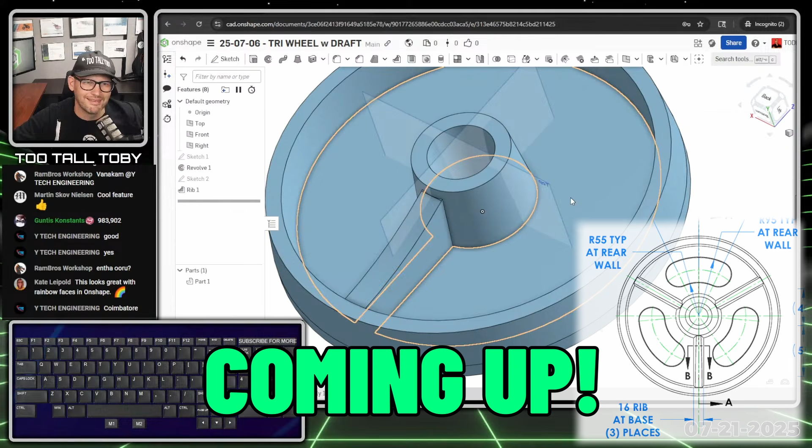Now, the one thing about this face here that really doesn't look that good is that we've got this face, and this face, and this face. We've got these kind of extra faces here.

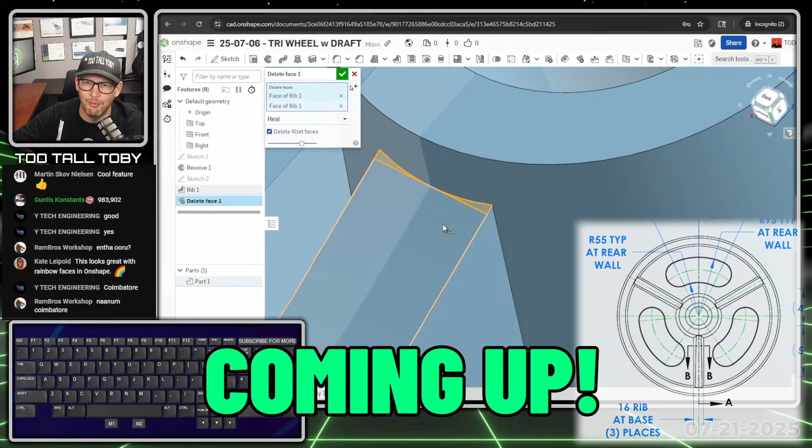So if you do want to get rid of those faces, I think the best way to do that is to use delete face. So I'm going to choose delete face here. And when I choose delete face, I can choose this little extra geometry that I wasn't anticipating. So I'm going to delete those two little faces and say heal, and hit the green check mark, and oh yeah, that's what we wanted.

Hey, what's up everybody, and welcome to today's Onshape step-by-step tutorial where we are going to design a plastic part with draft. This is a pretty cool part. It uses drafted angles on various features, some ribs, some patterns. I think you're really going to enjoy this part.

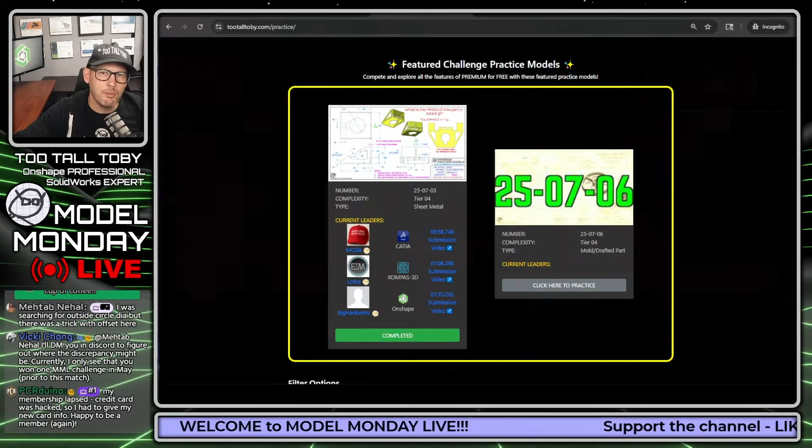So go ahead, jump into it, it says click here to practice, and all of you can attempt to model this. And now we are going to attempt to model this together using Onshape.

So right now we're watching this episode of Model Monday Live. It's July 21st, and all the people over in the chat are attempting to create this 3D CAD model, and now we are going to try to create it as well. Maybe we can beat some of these speedsters in the chat.

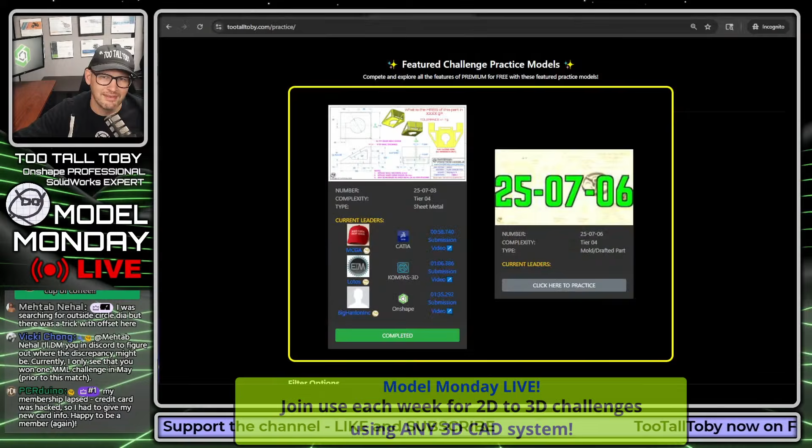If you haven't joined us for Model Monday Live in the past, be sure to join us for the next episode. On this second half of the show, we are going to be challenging the chat and each other by doing a live solve using Onshape, solving this using the Too Tall Toby Practice Models app. So we're going to head over to tootalltoby.com.

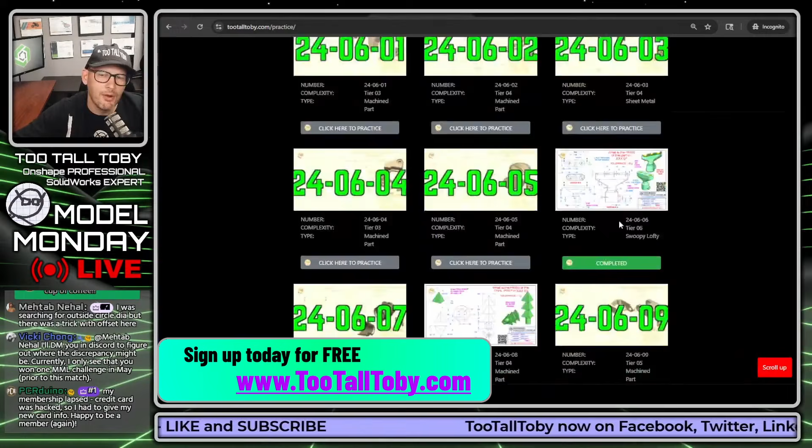We're going to sign up for a free account. We're going to click Access Full Library. And we'll see here that up at the top of the library, this is a library of over 190 challenges. They can be sorted by the type of challenge you're trying to do, whether it's a 3D printed part, a woodworking part, or a sheet metal part. They can also be sorted by the level of complexity: tier 1, tier 2, tier 3, tier 4, tier 5. You can do all this cool sorting here.

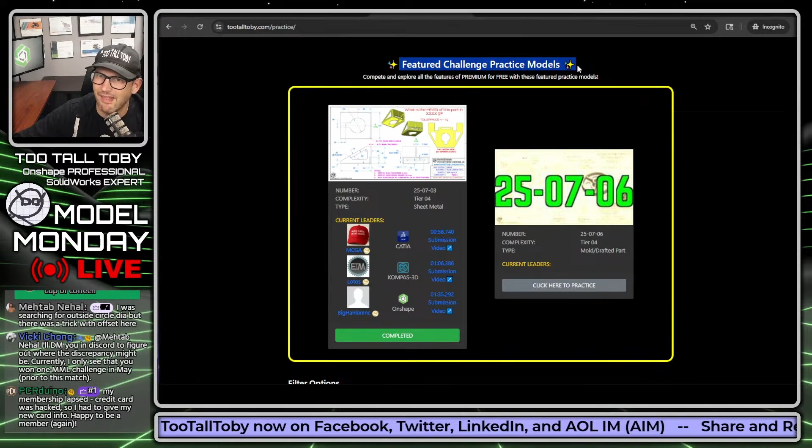But what we're also able to do is participate in these featured challenge practice models up at the top of the screen. And right now, all the people watching Model Monday Live are trying to complete this challenge here.

So I'm going to click here to practice, and we'll see there's a lot of skills tested in this challenge: draft, patterns, revolve, ribs, slot tools, symmetry, thin walls. I got a feeling this part is going to be plastic injection molded just from that list of skills.

Let's see here. Nobody's done this yet. We just released it about 30 seconds ago, so of course nobody's done it yet. I'm going to click here to begin and go. So the question here is, what is the mass of this part in grams? We're going to try to calculate that mass, and then enter it down here.

If we enter it correctly, we're going to earn a point. If we enter it incorrectly, it's going to say your answer is incorrect. You need to keep trying.

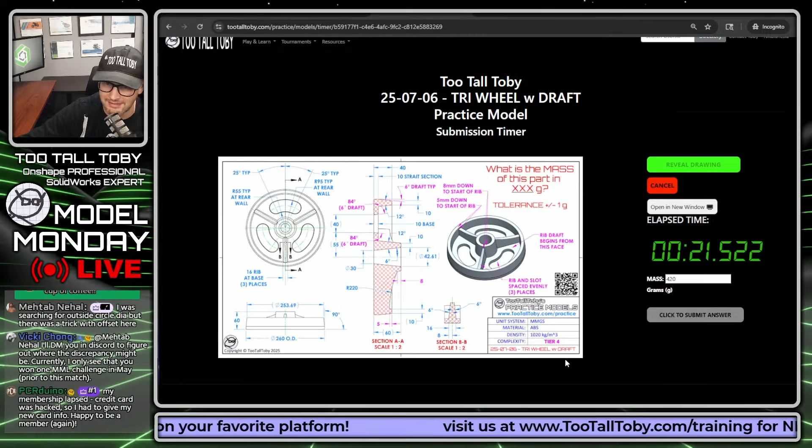So we need to come up with the correct mass, and we need to come up with the correct material density. We see in the title block that the material density is 1020 kilograms per cubic meter, and that is the material ABS, which I've already got in my Onshape custom library.

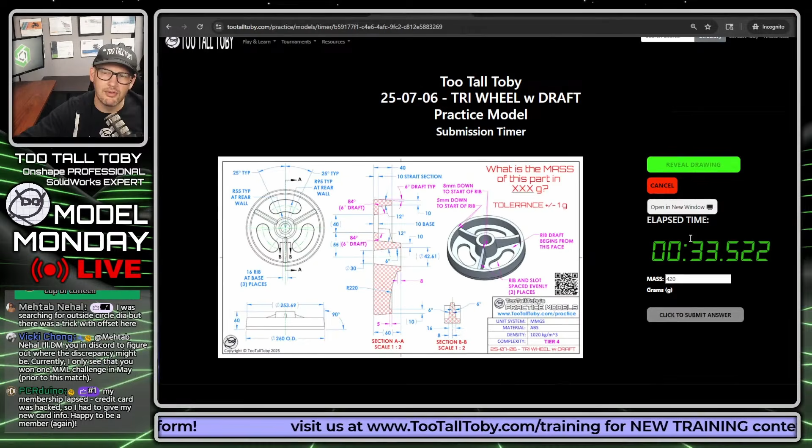So what I like to do is, even though the clock is running, before I get started, I like to come up with a game plan of how I'm going to model this thing up.

So I'm looking at this thing, I'm seeing that there's a lot of draft on this part. We see that there's 6-degree draft typical. So we've got this draft here on this sidewall, some draft here as well, some draft here in this kind of center hub area, some draft all the way down to the bottom here.

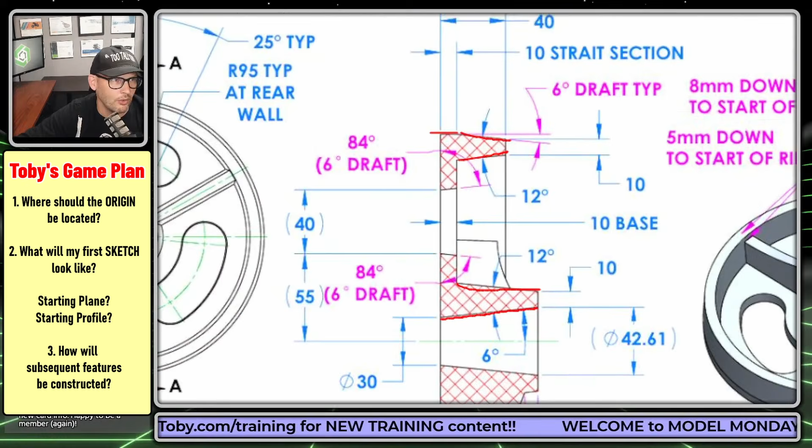It is kind of interesting. There's a section here that's got a note on it that says 10 millimeter straight section. So it's almost like the sidewall here. If we're looking at this thing in the isometric view, there's like a straight section there for some reason.

Normally you wouldn't see that in injection molding, although, depending on the geometry and depending on the material, sometimes you could get the ejector pins to push that part out even if it had a flat wall there. But you run the risk of that maybe getting stuck in the mold. So normally you wouldn't have that.

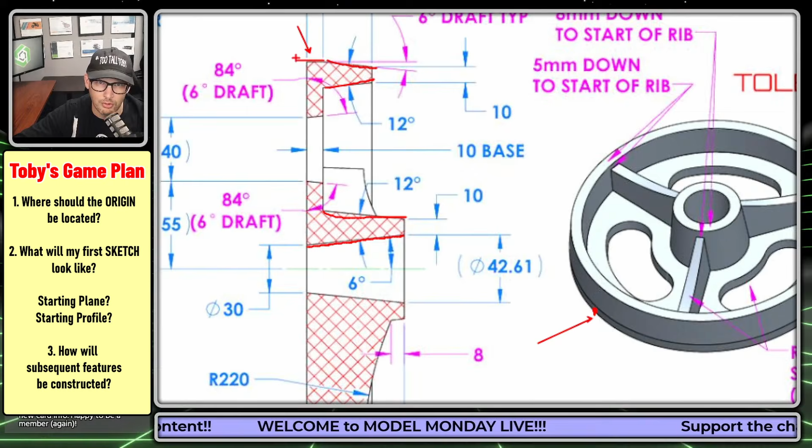But in the case of this model, we can see that we do have a little section on the model that is truly vertical. It's kind of interesting there.

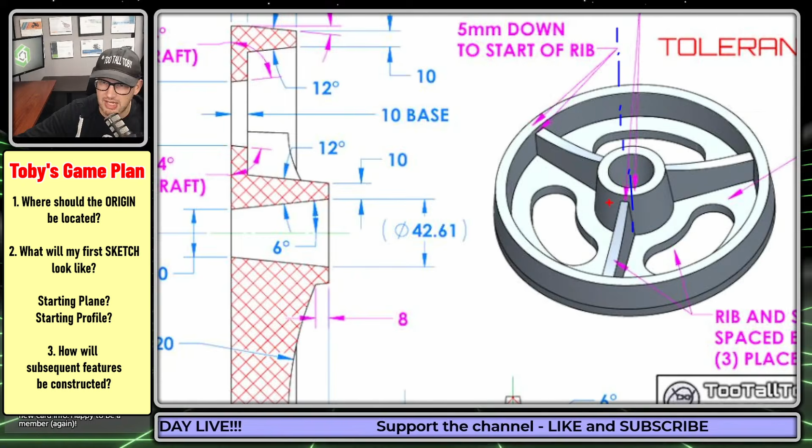All right, so now let's talk about the game plan. I think in a model like this, what I'm going to do is I'm going to start out with a revolved shape. So with a revolve, what you would do is you would start out with maybe a construction line coming up through the middle, and then you would create the geometry that you're going to be revolving about that construction line.

So I think what I'll probably do is draw a shape that looks something like this. If we were imagining this as a section view, I'll create a shape that looks something like this, and I'll leave that gap there for that center bore, and then I will revolve that about a center line, and that's going to give me kind of the main wheel shape.

So if we're looking at this over here in the section view, that shape that I just drew is going to look something like this. It's going to come up here, over, down, at the angle. I'm going to include the draft angle there, over, up, at a draft angle, down here, and then we'll have this little straight section, and then we'll close that off.

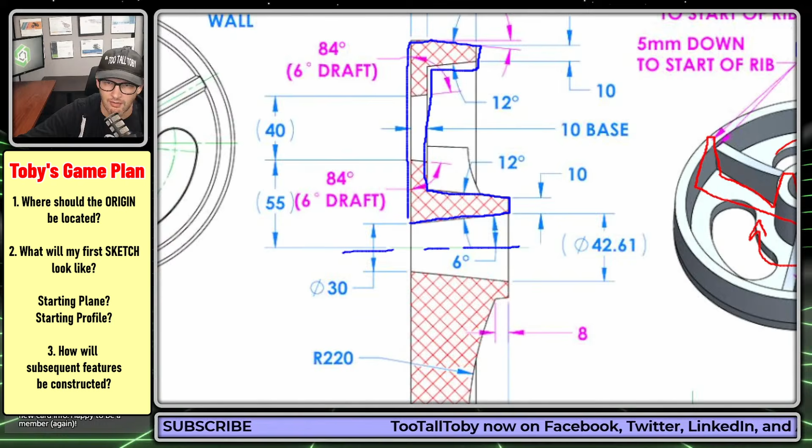That's going to be my first sketch along with a little construction line here, and that way I can revolve that first sketch. I think the next feature that I'm going to try to tackle is going to be this rib shape.

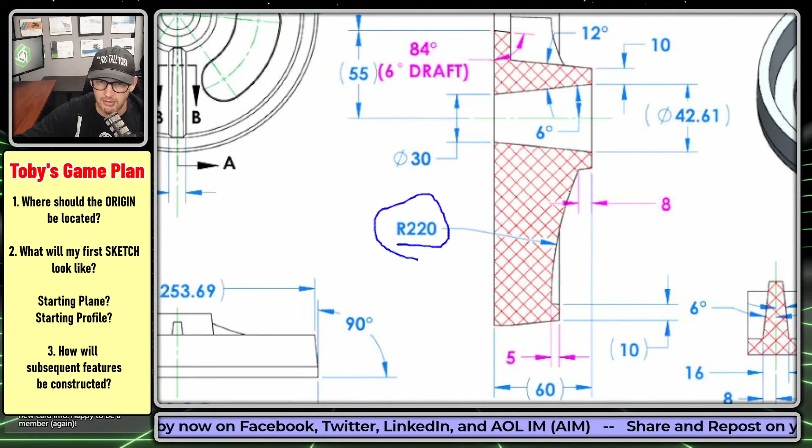So we notice here that with these notes on the rib shape, we're starting out here 8 millimeters down from the middle of the part, 5 millimeters down here from the outside of the part. And it looks like that rib has some curvature to it. It looks like it's got a radius here of 220 millimeters. So it's kind of an interesting rib shape, kind of a curved rib shape.

So I think what I'll do is I'll probably create that right here, right on the right plane, create that rib. And then I think I'm just going to bring it down with some straight geometry, just straight down into the model, and then I'll go back in afterwards and add some draft, because you can see here the rib draft begins from this face down here.

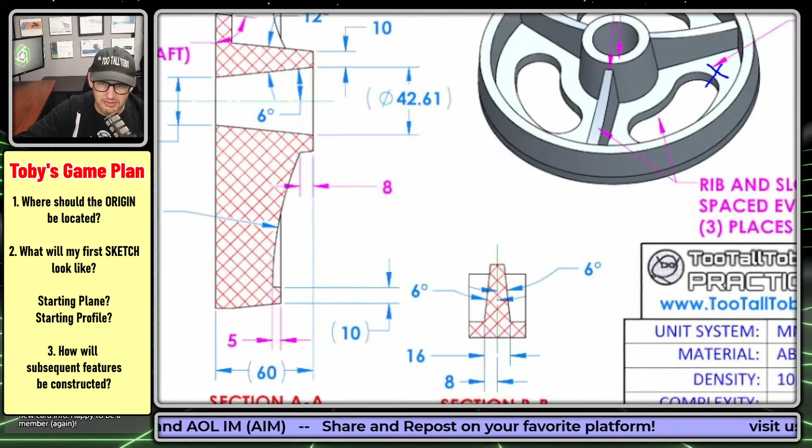Another little Toby note there. You wouldn't normally see that in an engineering drawing, but we're doing kind of education here. Instead what you would typically see is like this section view BB, where we're clearly seeing this is 16 millimeters at the bottom, and then we're seeing it's got 6 degrees per side of draft going up to the top.

We can also see that there's a note here looking down on this thing from the top view. These ribs are 16 millimeters at the base.

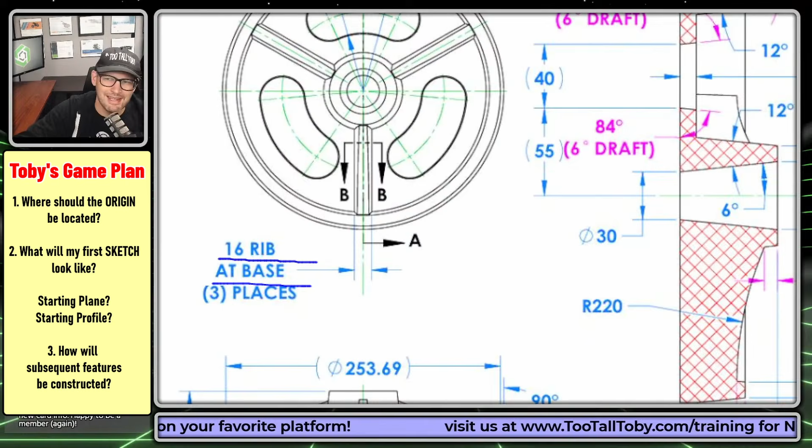So a little bit tricky here if you've never done any injection mold design. This might be new to you, but basically we'll add some draft here using what's called a neutral plane, and then we'll bring that up. This is kind of a cool feature because we're also going to be able to use what's called an intersection curve, which is a cool thing you can do when working in 3D CAD.

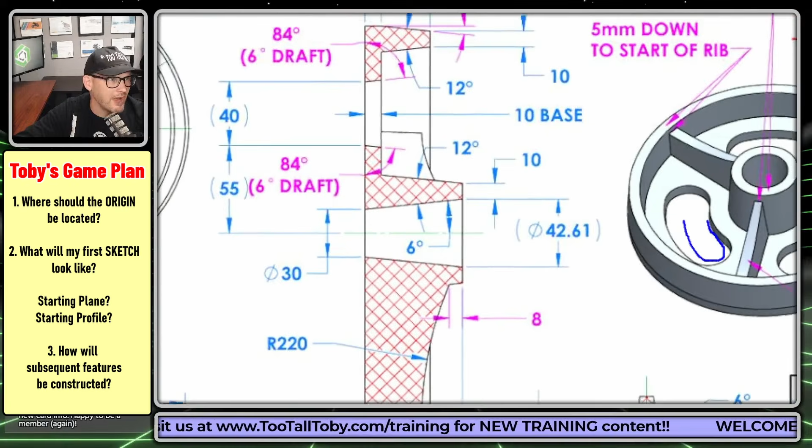All right, so that takes care of those features, and then I think the final feature we need to create is going to be this slot shape. And once again, we do have some draft here on this slot shape. So we can see that we've got this dimension 40 at the bottom, and then we've got 6 degrees of draft on that slot shape.

And if we come over here, we see that this note says radius 55 here at the rear wall, and radius 95 at the rear wall. So that 55 and that 95 makes that 40 that we saw in that side view.

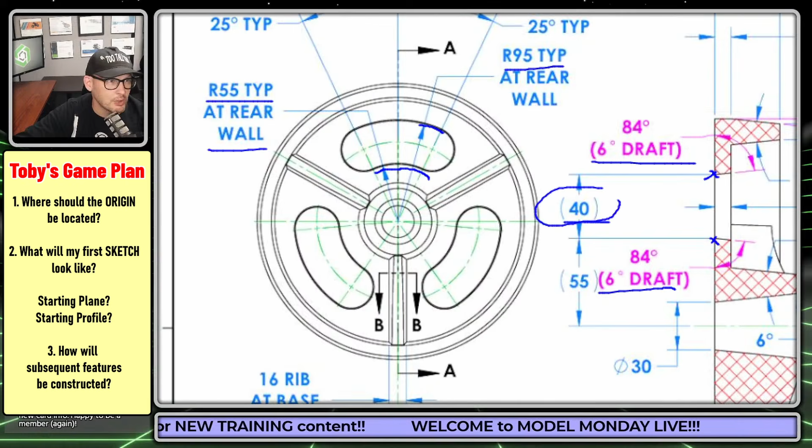So I think what I'll do is I'll create that sketch on this back face, and then I'll probably just cut extrude it with draft. May as well just include the draft in that cut extrude.

So a few different ways that we're going to be creating draft here: draft during the revolve, draft in the rib with the neutral plane, draft as its own feature, and then draft as part of the cut extrude. And then once we're done, we can just pattern that around 3 times, and we should be good to come up with the answer.

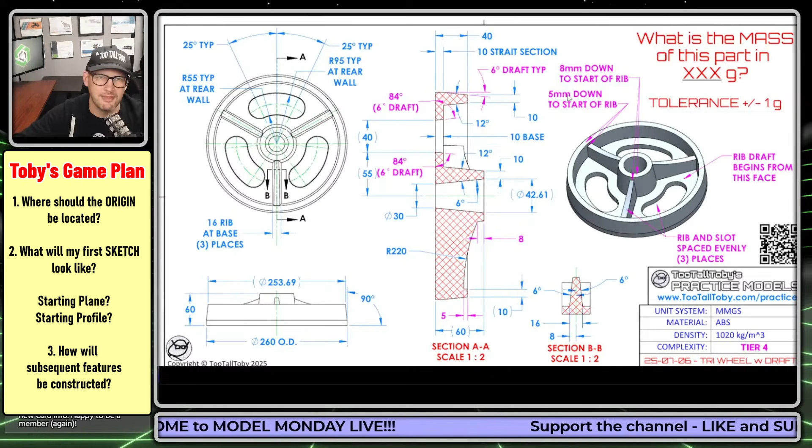So let's see if that comes in correct. Let's see if any of our speed demons in the chat are able to beat me.

And I'm going to move this over to my second screen so that I can start creating a document here in Onshape. So I'm going to say create document, and we're going to call this 25-07-06 tri-wheel with draft.

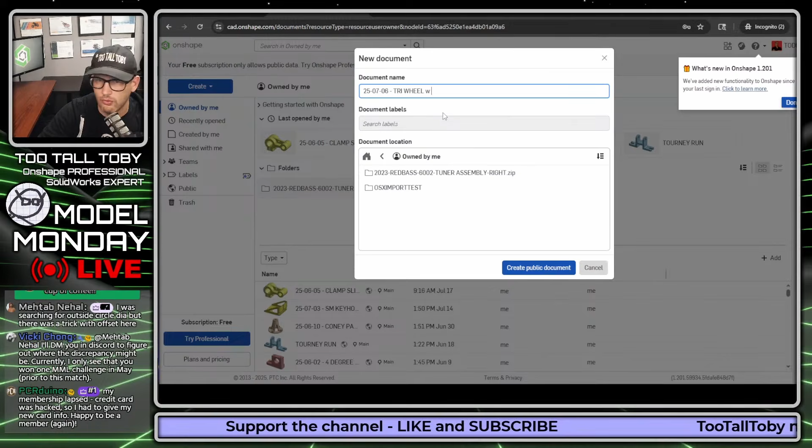Now, the thing is, I'm going to be creating this here in the Onshape public space. And the nice thing about this is that if you're using Onshape either as a paid user or even the free version, you can search this public space and search for this file name, and then you'd be able to see my model with the history tree.

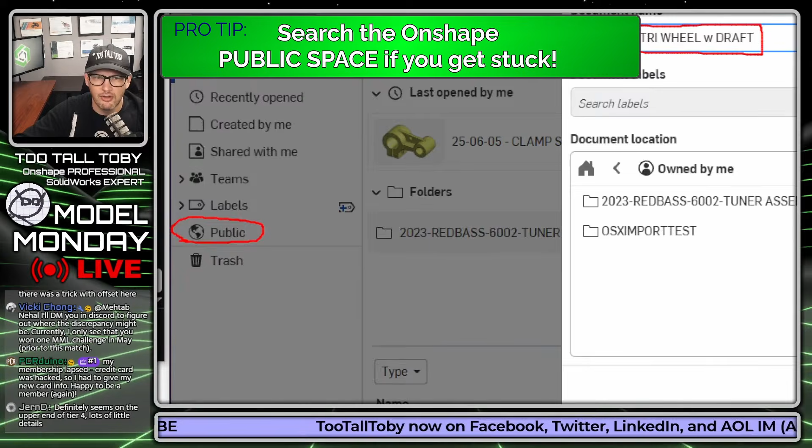So the nice thing about that is even if you're not an Onshape user, if you get stuck with this model, it might be helpful to poke through the history tree, and it might help you get unstuck. Really nice feature there of Onshape, that ability to create that geometry and have it shared out to the world. So I'm going to say create public document, and that way anybody who wants to can get in and search for that document.

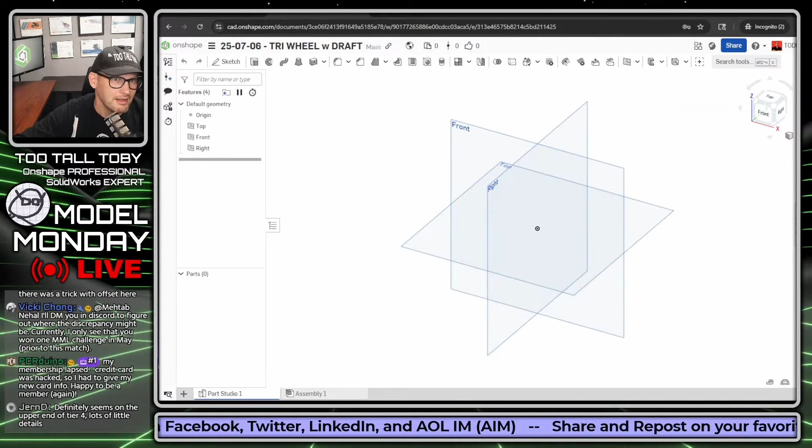Jern in the chat says, definitely seems on upper end of tier 4, lots of little details. Yeah, it was surprising to me how few features ended up in the tree. So the tier 4 is really the complexity more so than the difficulty, and the complexity is just based on the number of features.

Difficulty is a little bit more subjective, right? Based on your experience. If you do injection mold design all day, every day, then this probably won't be that difficult. But if this is your first time working with an injection molded part, you might get a little bit lost in the details for sure.

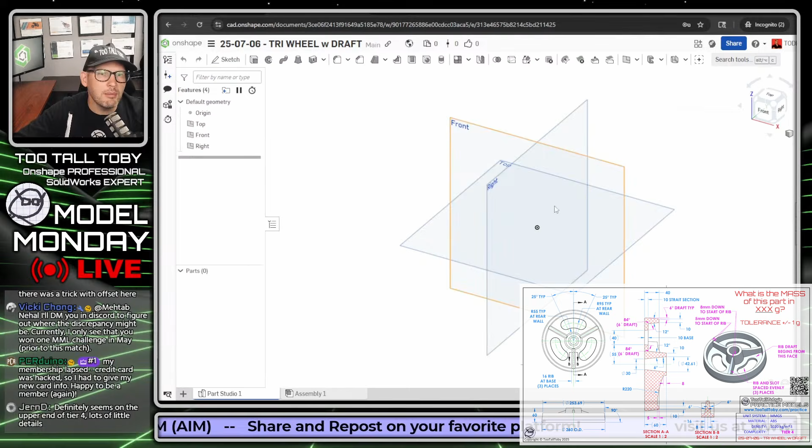All right, so now that we are in this model here in Onshape, I'm going to start out by clicking on this icon up here. And what that icon does is give me access to a menu. It's called a hamburger menu, and from the hamburger menu I can choose my workspace units. I always like to do this, I like to look at the drawing, look at the title block.

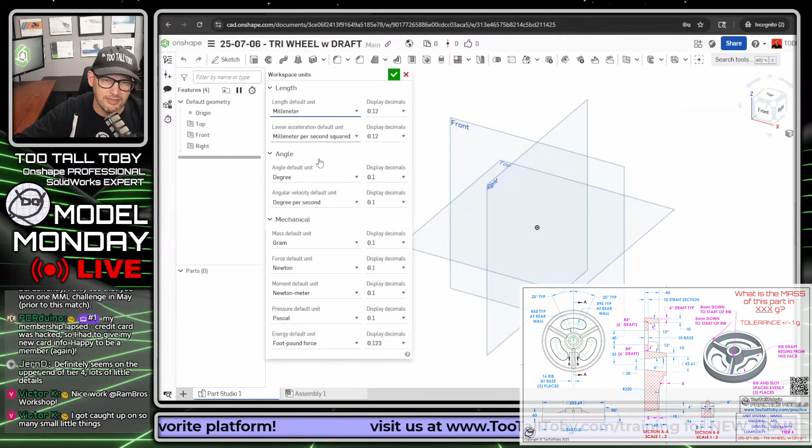It says it's in MMGS. I always like to make sure that my unit for length is in millimeters and my unit for mass is in grams. So those two both look like they're correct.

Now let's get into our game plan here and start with our first sketch. I think what I'll do is go to the right plane to create this sketch. I'm not really sure which plane I want this to be on. I mean, this is kind of like the front view, right? Should I sketch it on its side? This is always a question that is sometimes easier to answer when you know how the model is used.

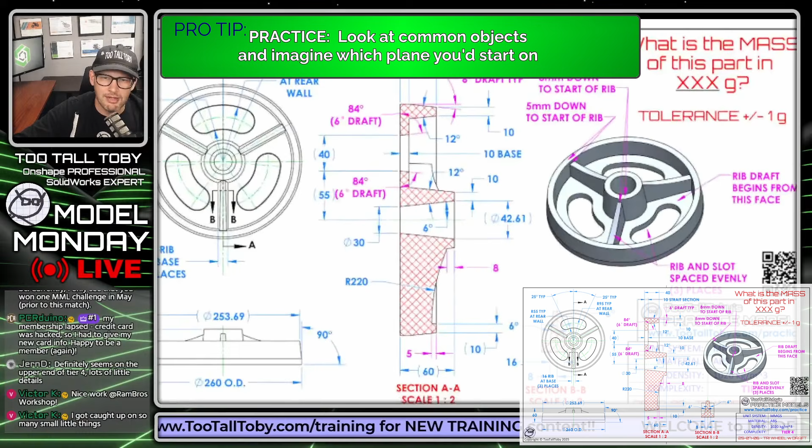But I think what I'm going to do is just make this my right plane like this, and sketch the whole thing on the right plane in kind of an upright position. I don't know if that's good or not. It depends on how this model's used in an assembly, but it should work fine.

So right plane, I'm going to press the S key. I'm going to begin a sketch. I'm going to press the N key.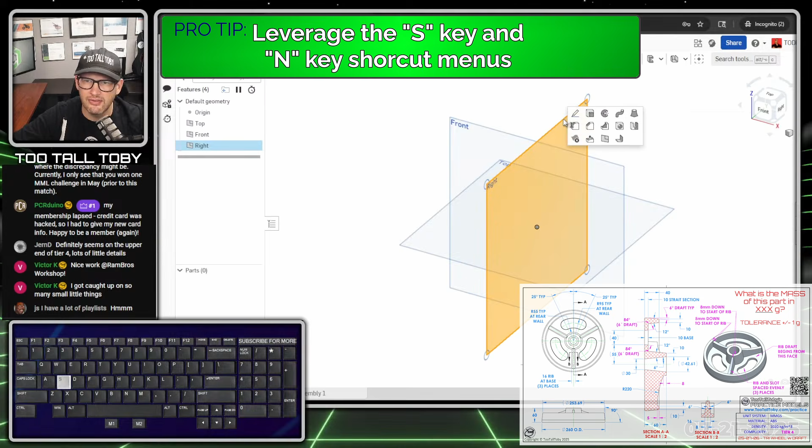So I click on the right plane, press the letter S, choose the sketch command, press the letter N. Now I'm in a new sketch on the right plane, and what N does is it rotates the view normal to, so it's a little easier to see.

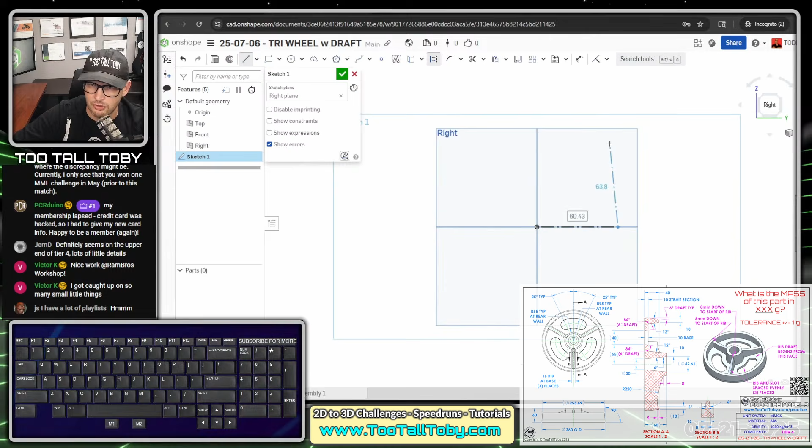Now I'm going to press the S key again. I'm going to create a line here, single click the origin, move over. I'm going to press Q, that makes that for construction, and I'm just going to drop a line out here. Maybe I'll make this close to the 60 millimeter max height, just to give me a little bit of a sense of proportion. Now I'm going to hit escape, and create some additional geometry using the line command.

Single click the line command. I could click here on this point, move up, single click, let go of my mouse, and type 15 because that lower bore is 30 millimeters. Then I can come out this way the rest of the way. Again, I'm just trying to establish a sense of proportion so that I'm not too far off with my final results here.

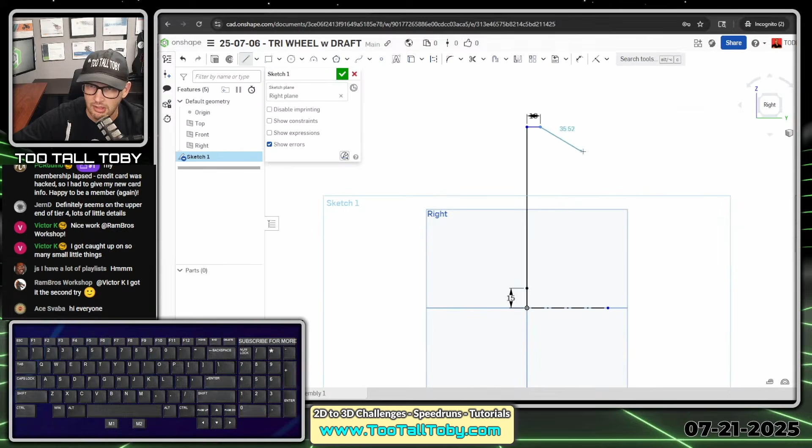So this one I'm going to come up at 10 millimeters. I'll move over here, 10, single click, let go, 10, enter. Then I'm going to kind of come up at an angle, move down this way, single click, let go of my mouse. I'm going to type in 10 because that upper ledge there is 10 millimeters. Move back down here at an angle.

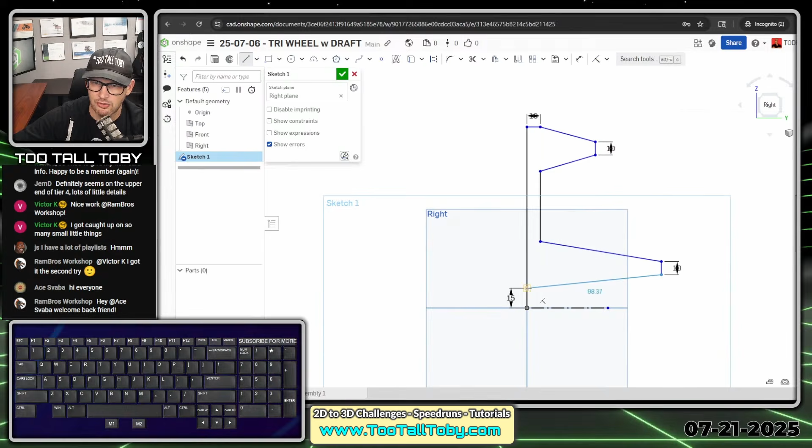Now the base is also 10 millimeters, so I could hold my mouse over this point and get a relationship there of vertical, and that way I don't have to add that extra dimension. Move my mouse down this way, move my mouse up like so. Single click, move my mouse this way, single click, let go of my mouse. I can type in 10 again, enter, and then finish off by coming down here to that original point. Single click, and boom, done.

Now, personally, I think I would rather have a diameter here at the bottom, so I'm going to hit escape, single click, eliminate that dimension, maybe even eliminate that line. It's not really going to hurt me, but it's just kind of in the way.

And then I could take this point and make them vertical, V. So that line there goes black. This line here, it's orange currently. You can see it's black, meaning it's fully constrained.

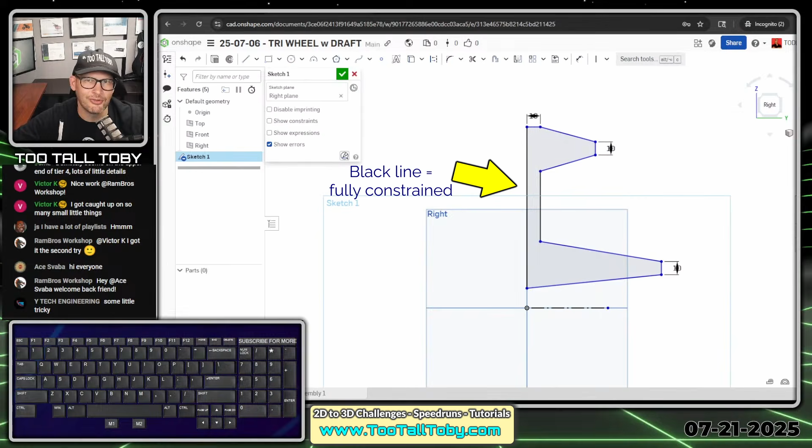And now I can go S key dimension, and I can create a dimension from this point to this line and then move across that line. That lets us create what's called a doubled dimension in Onshape, very useful in Onshape. So we're going to make that 30, enter.

We're going to create a dimension here from this point to that line. Again, cross over that line for that doubled dimension. That's going to be 260, enter. We could create a dimension that goes from this line to this line.

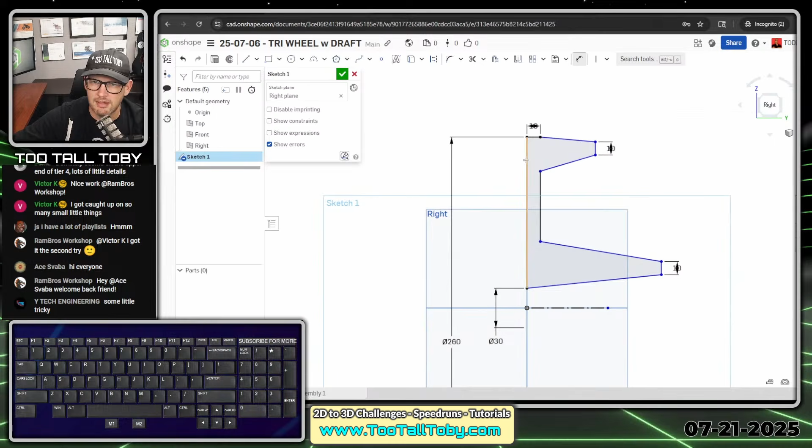That dimension is going to be at a height of... let's see here, 40, enter. And then a dimension from this line to this line, that's going to give us a height of 60, enter.

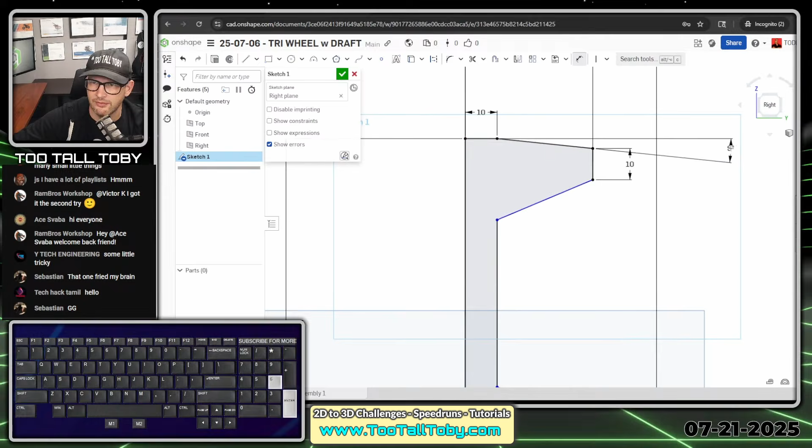And then the final dimensions we're going to put in here are our draft angles. From this line to this line, that's a draft angle of 6. From this line to this line, that's 6 plus 6, so that gives us 12. So draft in both directions. Dimension here from this line to this line, that's going to be 6. And then a dimension here from this line to this line, that is going to be 12.

For me personally, I think this is a great place to stop with that first sketch. It gives us all the key dimensions for that revolve. The sketch is starting to get a little cumbersome, and I don't really like it when my sketches get too complicated. So if you're watching this as a tutorial, maybe take a moment, pause the video, and get your sketch to look like this, and then you'll be ready to move into the next step and turn this thing into a revolve.

So I think what I'm going to do next is I'm going to choose to revolve this thing.

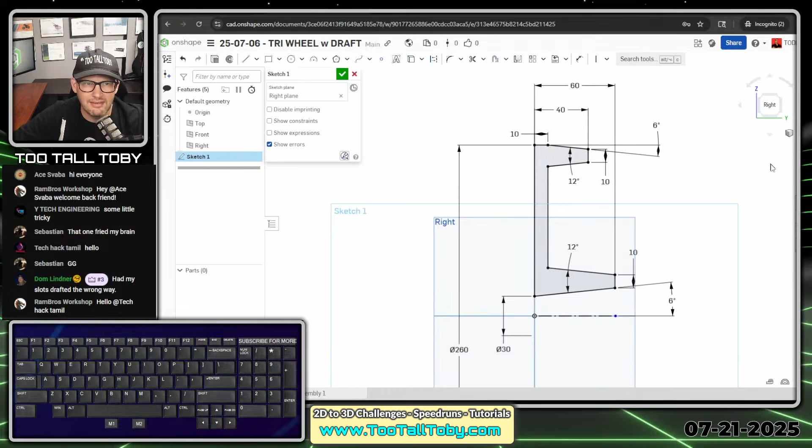I see in the chat, Sebastian says that one fried my brain. Yeah, this is definitely one with a lot of cool little details. I'm glad to hear that. I mean, I'm sorry to hear your brain got fried, but I'm glad you like these kinds of challenges because these are the fun ones. Remember, the website's supposed to be like a gym for your brain. TooTallToby.com, practice models, it should be like a gym for your brain. So if your brain feels fried this time and you go back and do it again, you're going to feel a lot stronger. And then when you run into something like this at the office, you're going to be ready to go, ready to handle it.

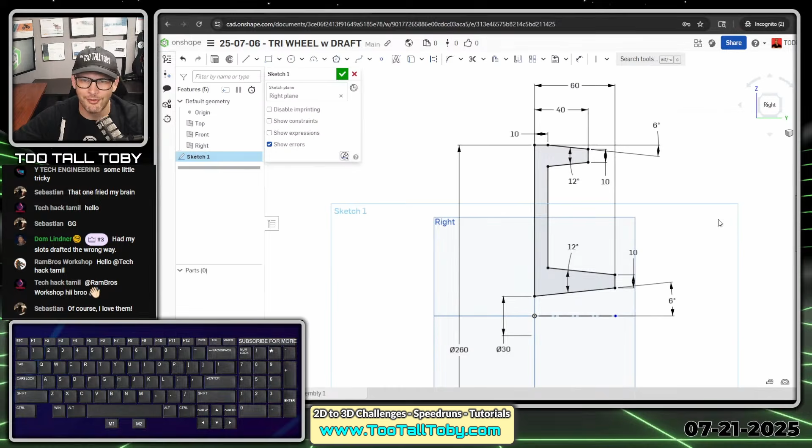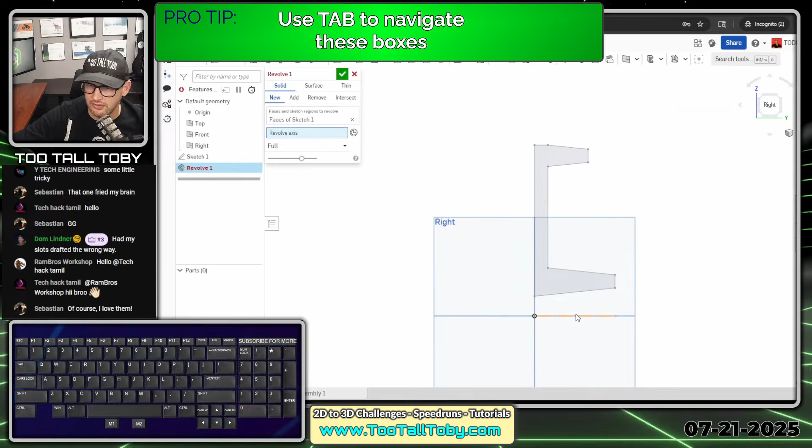So let's say this is our first sketch, we're going to go to revolve. In Onshape, what I do here is I've got this whole sketch, I've got this center line that I'm going to revolve about. So I just click revolve, and then I just press tab, and what tab will do is advance me from this box down to this box. So I use the tab key as a shortcut for that workflow. Tab, now I'm in revolve axis. Now I can just click on this line down here, my center line, and then press enter. Boom, there's that revolved shape, and that's kind of the main shape of the wheel.

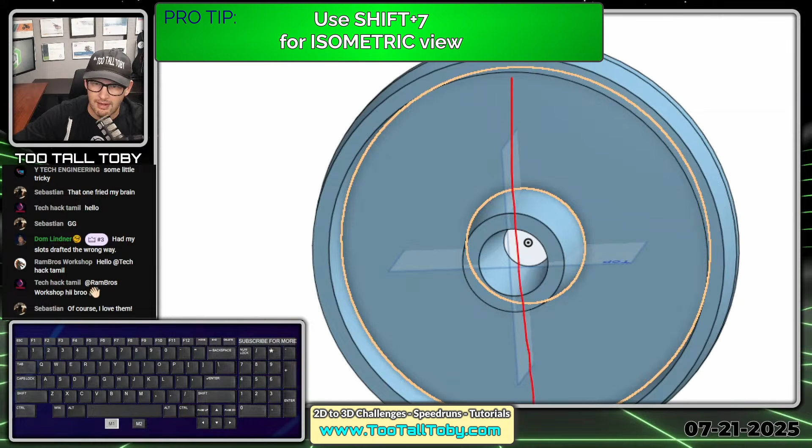I'm going to press Shift 7, which is my shortcut for isometric, and that way I can kind of see which plane is cutting down through the middle here, and it looks to be my right plane. So I'm going to pick that right plane, S key, begin a sketch. And now I'm in sketch mode here on the right plane.

Now I'm going to use a really cool command in Onshape called intersection curve. What intersection does is let us grab the intersection of the right plane, which we're sketching on, and this face here, which is a cone. So it's going to let us grab that intersection and turn it into a line. It's going to let us grab the intersection of the right plane and this face here, which is planar, so we're going to have a line that comes across here. It's going to let us grab the intersection of this face here, which is a cone, and the right plane, so it's going to let us create a line here like so.

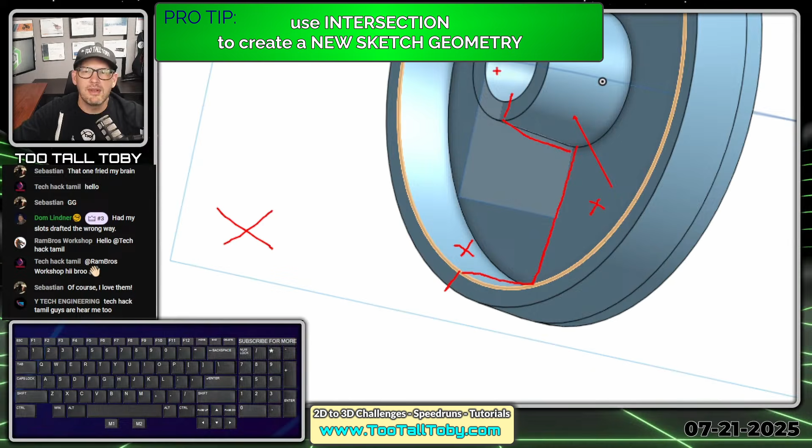And I'm just going to grab a few other lines. The reason I'm doing this is because I think it just really makes it easy for you to visualize what's going on through that section of the model. So I'm sketching here on the right plane.

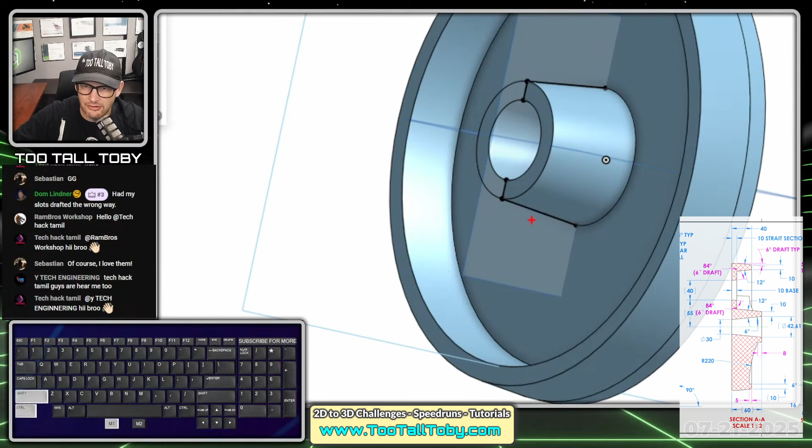I'm going to fly out this menu that says use, and choose intersection, and then start picking these faces. This face here, wherever it's intersecting the right plane, lines have been created. This face here, and this face here, and maybe even this face here. This makes it easy to quickly get almost reference geometry that you're going to need to create this rib shape.

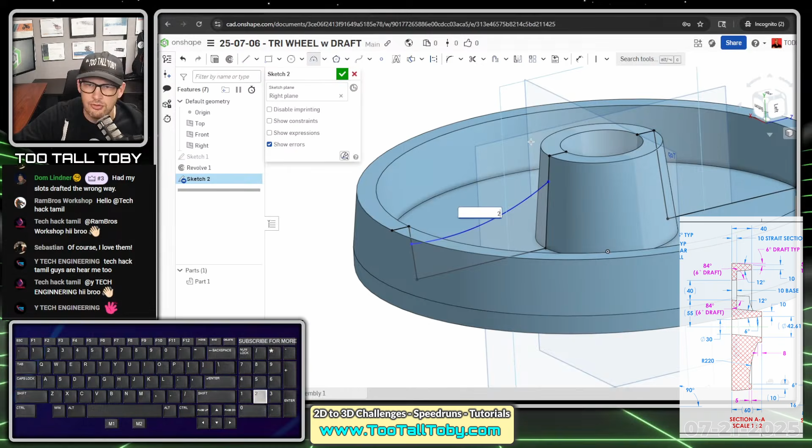Because now to create the rib, all we need to do is choose the 3-point arc command. I'm going to exit the intersection command and choose the 3-point arc command. I'm going to draw an arc that goes from here to here, a little arc between those two. Then I'm going to give that arc a radius of 220, enter.

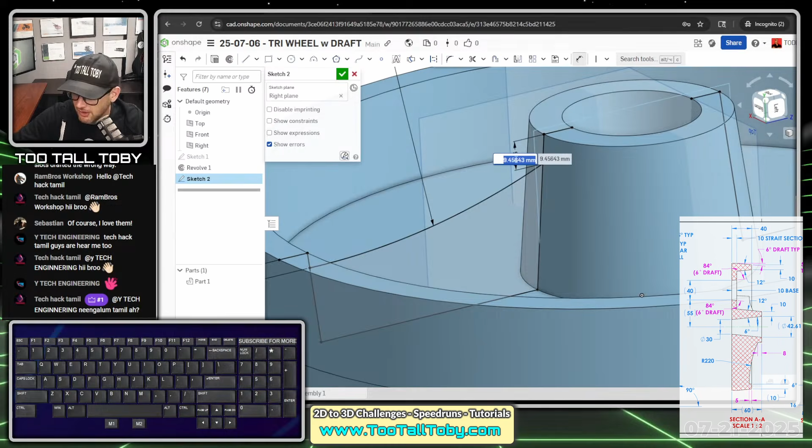Now all I need to do is add in my dimensions. I'll press the S key, go to dimension, and create a dimension from this line to this point. That dimension is going to be 5, enter. Let's hit escape and get this point down below here. S key, dimension from this line down to this point, and that's going to be a dimension of 8. And boom, we are done with that sketch. That's the sketch for the rib.

Now, I know there's a lot of extra geometry here. Do we have to go through and delete that? No, not at all, not in Onshape. We can just exit the sketch and choose the rib command, up at the top there.

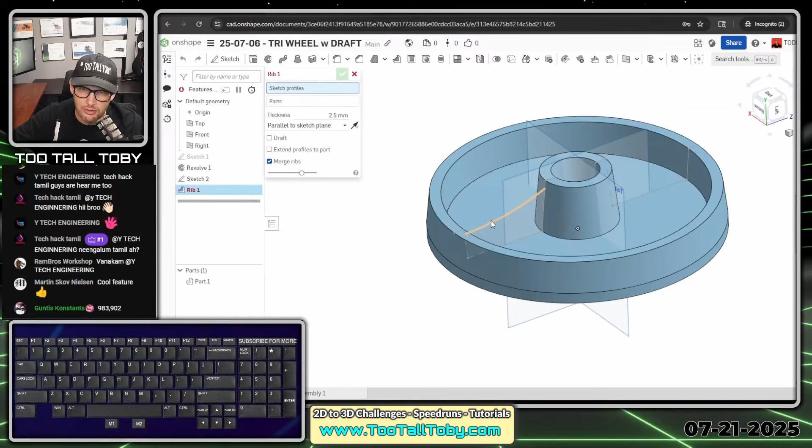Once we choose the rib command, we can choose our sketch profile, which is just going to be this arc here. We can then choose this second box, parts, and just click this part. I noticed it really helps if you choose this second box and click the part—if you're not getting your rib preview, that may be the extra step you need.

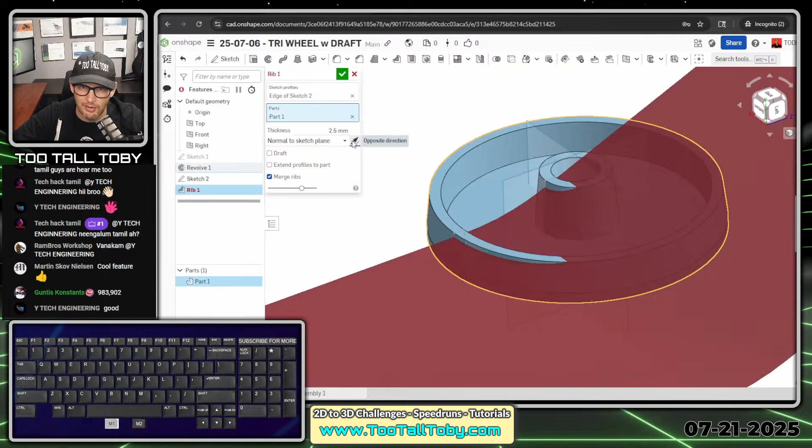Then you've got the option here: parallel to sketch plane or normal to sketch plane. Normal to sketch plane goes a little crazy, but parallel to sketch plane actually works this time. Basically, when we sketched on the right plane, the right plane runs through the model like this, so the rib will also run parallel to it, as opposed to normal to the sketch plane, which would be 90 degrees from it. Sometimes that's what we want, but not in this example.

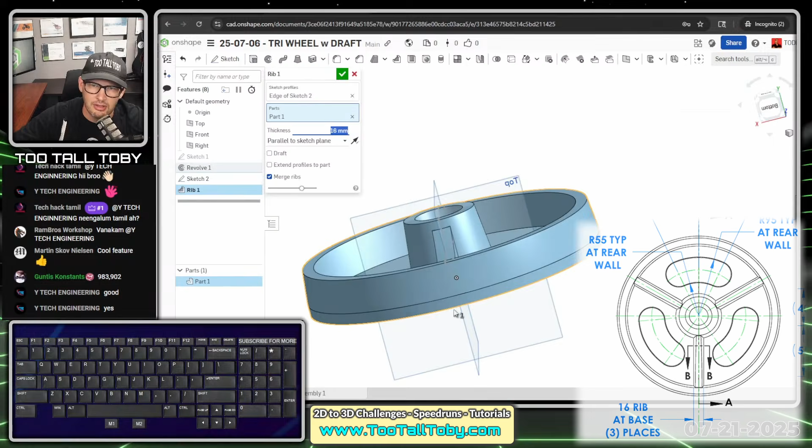So we're going to change that thickness to, let's see, 16 millimeters, enter. And there we go, there is our rib. We're also going to use this option that says extend profiles to part—that will extend this little extra amount here, in case it wasn't coming through. Then we hit the green check mark, and that creates our rib at 16 millimeters.

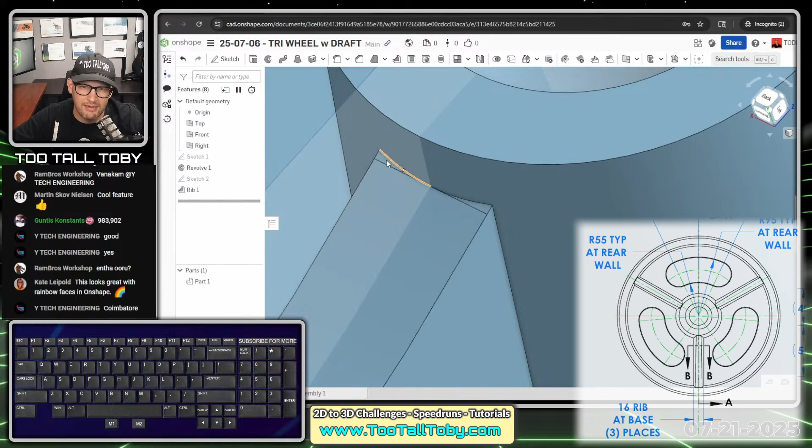Now, the one thing about this face that doesn't look that good is we've got this face, and this face, and this face—these extra faces here. Is that really going to make a big deal? It might not, depending on if you're using finite element analysis, or if your machinists have a problem with those extra faces. So if you do want to get rid of them, I think the best way is to use delete face.

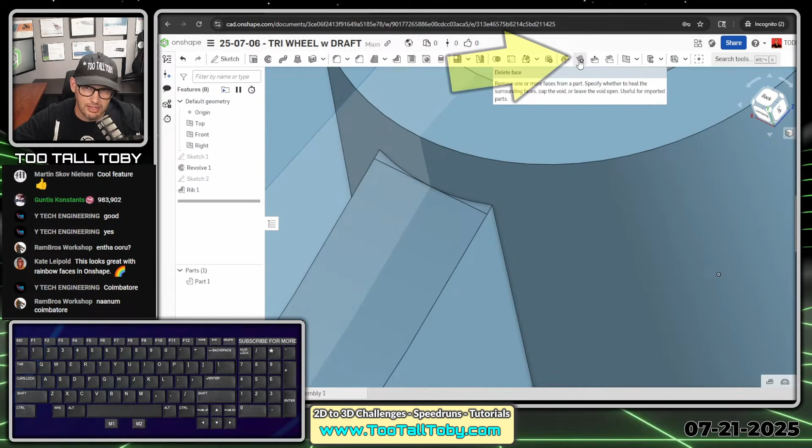I'm going to choose delete face here. I can choose this little dingus, extra geometry I wasn't anticipating, and delete those two little faces, then say heal. I hit the green check mark and, oh yeah, that's what we wanted.

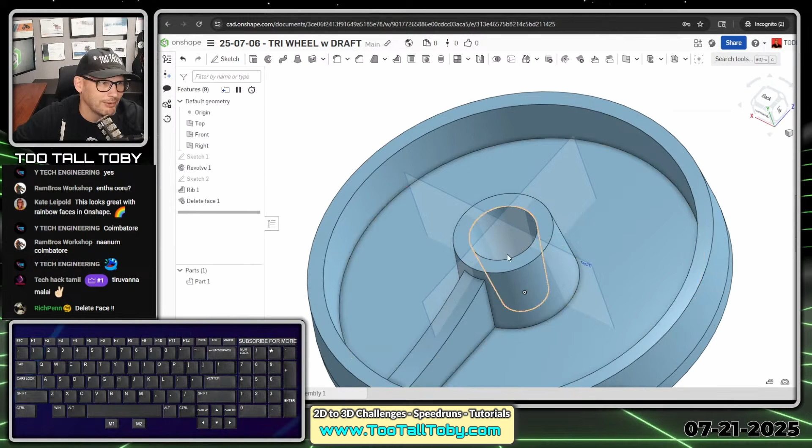We always see those questions: is there any way to get rid of these extra little faces? Well, a lot of times the way you get rid of them is with delete face. Delete face is absolutely epic.

Now we're going to add draft manually, after the fact or after the feature, by choosing this button right here, draft. So we choose draft and then we say neutral plane. Now what neutral plane is, it's where the draft is originating from. In the case of this rib, the draft is going to originate from that bottom face of the model.

We saw some notes on that, and we also see that in the section view BB. So the draft is going to originate from the bottom face of the model, or from this face here, the bottom of the pocket. So that is our neutral plane.

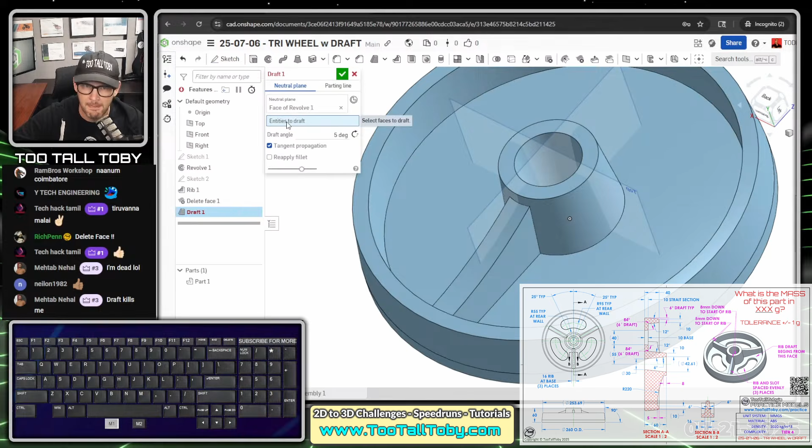And then for our entities to draft, we're going to choose this face and this face. And then finally, we're going to say that draft angle is supposed to be 6 degrees per side. So you would just type in 6 here, enter, and enter. And then we look at that rib, the isometric view. Thumbs up, that looks pretty darn good.

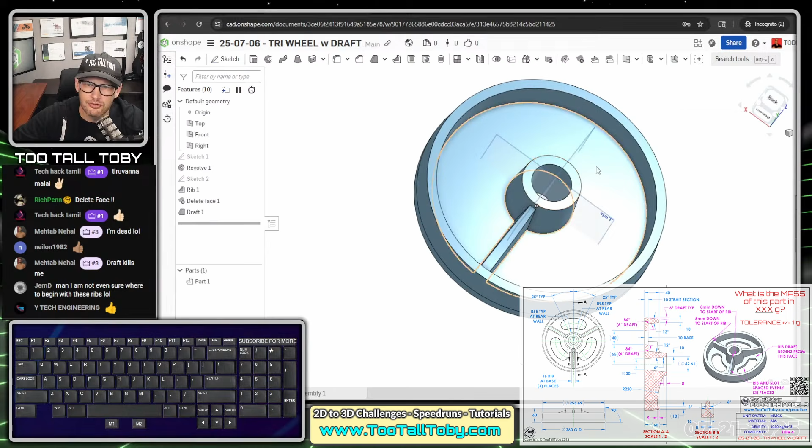So that takes care of that feature. And now the final feature we need to create is the cut extrude on the back side of this, and then the pattern. So we're going to roll around here to the back side. We're going to begin a sketch on this face here. S key, begin a sketch, N key to get normal.

And we are going to create a sketch of an arc here like so. And then we're going to hit escape. We will take this point of the arc and this point here at the origin and press I for coincidence.

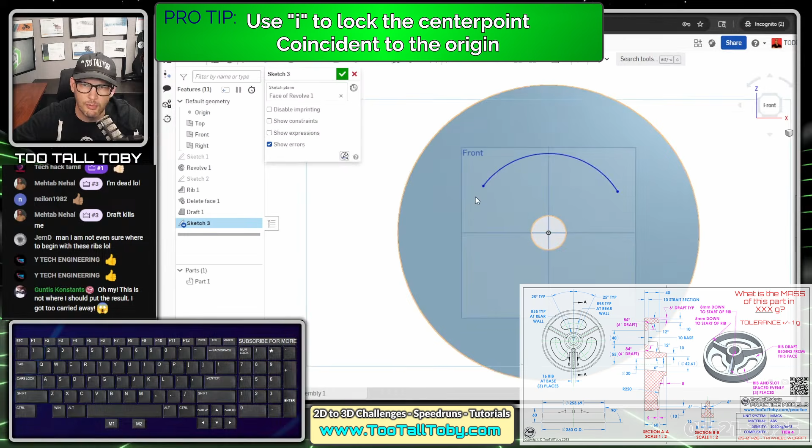And then we are going to create a dimension there. Actually, you know what, let's create some angle dimensions here. So we'll create a line here as well, using Q to make that a construction line. And I'll create a line here as well, using Q to make that a construction line. Let's create some angle dimensions here.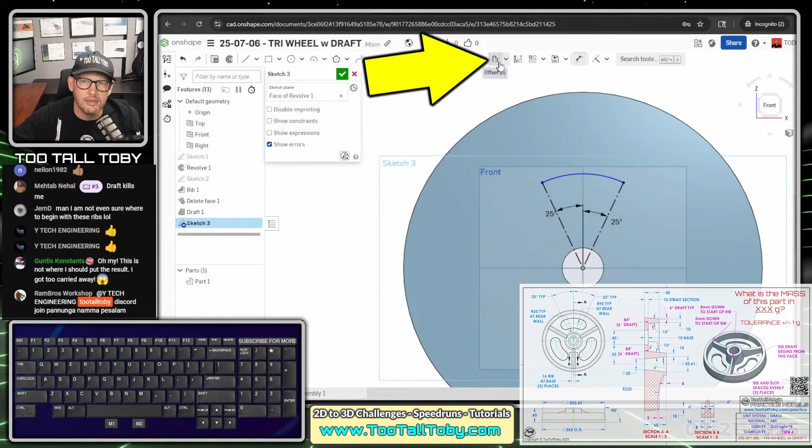So we'll create an angle dimension here at 25, and we'll create an angle dimension here at 25. And then once we have those angle dimensions, let's just turn that arc into a slot. So we go up here to the offset command, and when you fly out the offset command in Onshape, you can choose slot.

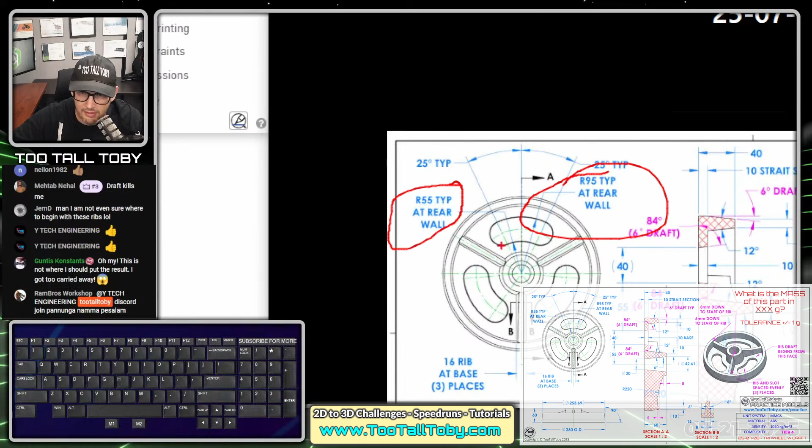So I'm going to choose slot here, and then I'm going to choose this arc, and then that slot distance is going to be that 40 dimension. It's going to be the difference between radius 55 and radius 95, this radius 55 at the bottom and this radius 95 up here. So we're going to create that at 40, enter, enter.

And then we can do a dimension for that lower arc here, and that dimension is going to be 55. Once you have those dimensions in place, that sketch should be fully constrained or fully defined. So again, if you want to pause the video, make sure that you've got that in the correct location if you're following along with the tutorial.

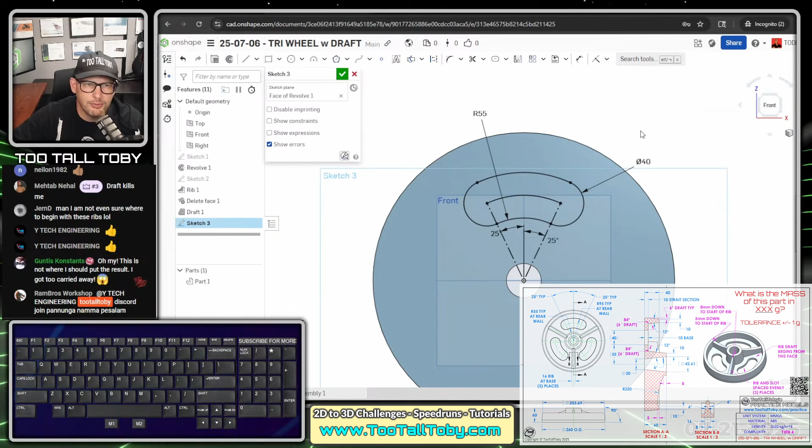And once we've got that, now we're ready to take this geometry and turn it into a cut extrude. So we once again choose extrude. So there we go, this is going to be a remove. So we're going to be removing that.

This could probably go through all. The only reason I'm saying probably is because sometimes when you have a draft, the draft can end up cutting into this wall. So I'm going to say draft for this, and I'm going to say I want that draft to be, let's say we made it 20 degrees.

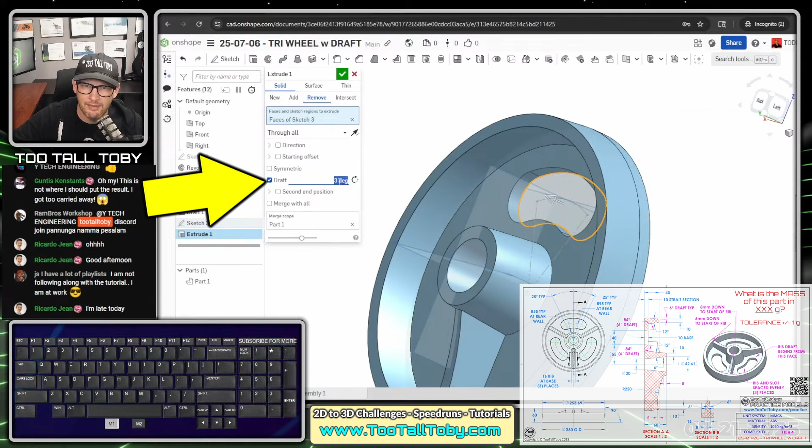If that draft was at 20 degrees or more, maybe like 40 degrees, it could end up cutting into this wall here. But with a very small draft, like 6 degrees, we're not going to have that problem. We've got plenty of clearance there.

So 6 degrees draft, that's going to give us 6 degrees per side. We hit the green check mark, and boom, there is our slot with draft.

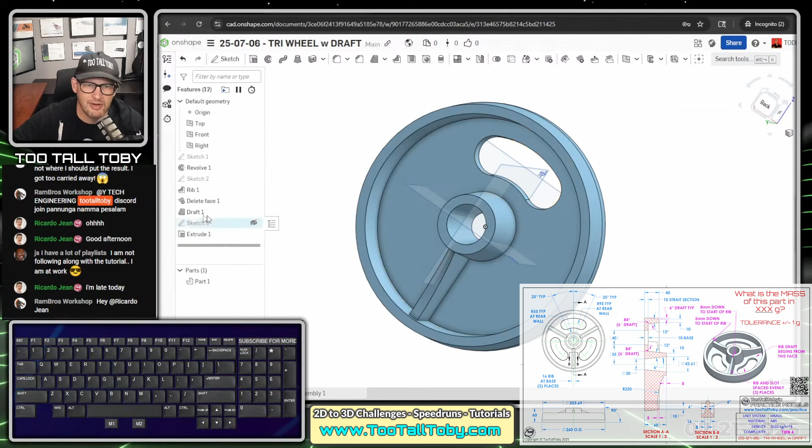So pick on that feature in the tree, Shift N for rename, and call that something like slot with draft. And maybe this one up here that we did earlier, the rib, click on that rib, Shift N for rename, this could be called rib with no draft. That way I know some of the features have draft included in them, some of them do not.

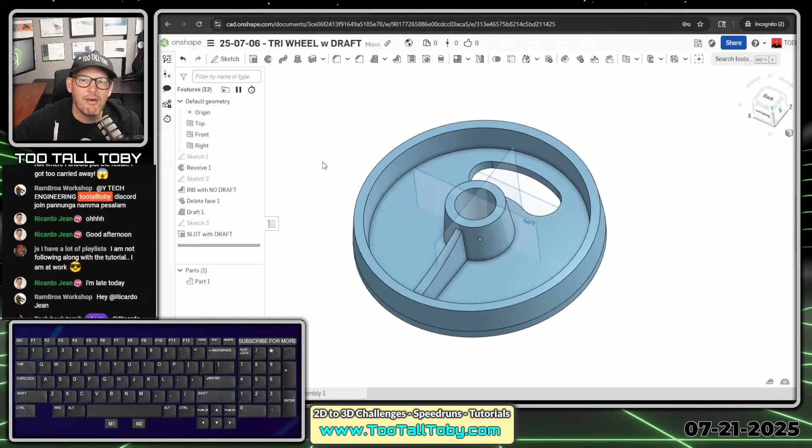Now in Onshape, we're going to finish this off by going into this flyout menu here and say circular pattern. You have to remember in Onshape that you have to fly out this menu and choose feature pattern. So circular pattern, feature pattern, and the features I'm going to pattern, because I renamed them, it's pretty easy to find them in the tree: rib with no draft, and then the next feature, delete face draft, slot with draft.

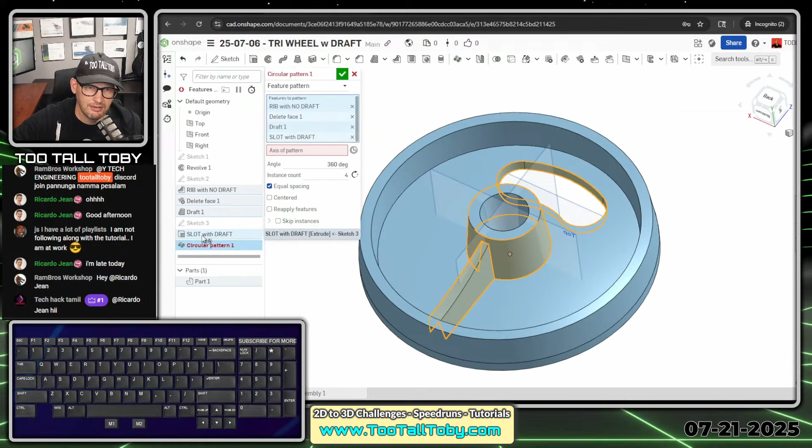Then the axis of the pattern, I'll just choose a circular edge, this one here at the OD. The number of instances is going to be 3, enter. Look at that, the pattern's looking good in the preview. I'm going to hit enter again or hit the green check mark, and there we go, there is the model.

We do what we call the final spin, kind of look at this thing all around, make sure it looks like the drawing. I think that looks pretty good.

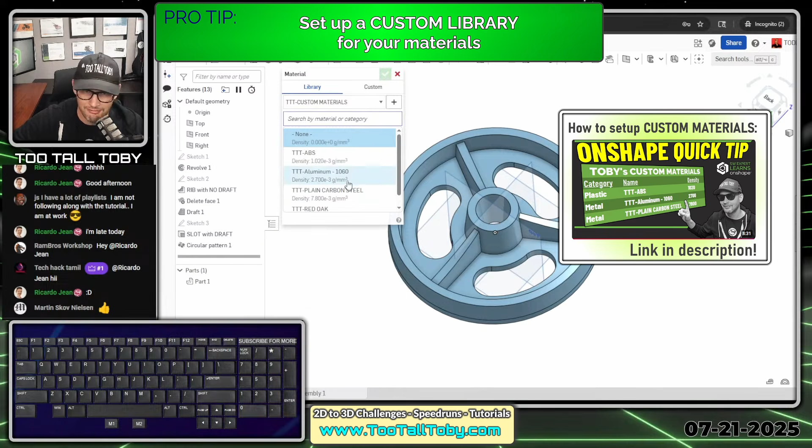Now I'm going to go down here to the name of the part at the bottom, right click and say assign material. This material is going to come from the Too Tall Toby library. I've got a video on how to set up the Too Tall Toby materials library, so I'll include a link to that video here in this tutorial. We're going to say that material is ABS and hit the green check mark.

Then I'm going to come down here to this corner and choose this mass properties button, click on this wheel anywhere on the wheel, and I'm coming up with a mass here of 943 grams.

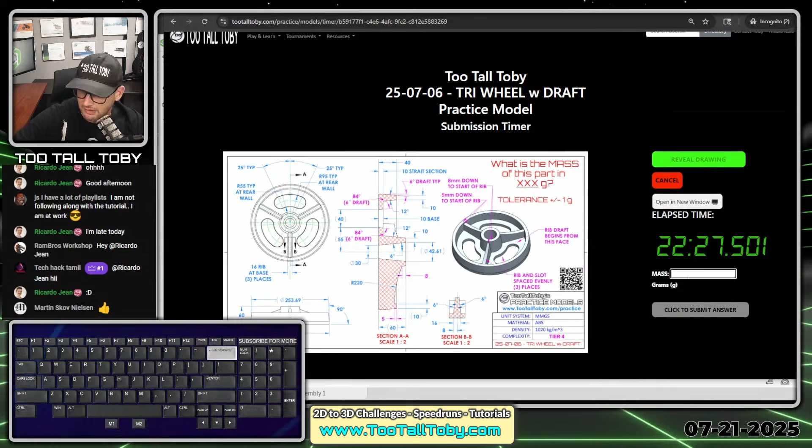Now I'm going to come back over here into the app and type in that answer, 943, enter, and oh yeah, we did it. Yes, we did it, we got it correct. Always feels good to get that purple box.

We see here that our time of 22:29 will be submitted and I'll be awarded 1 point on the community scoreboard. So I'm going to say submit, and yes, we did it, we got that answer correct.

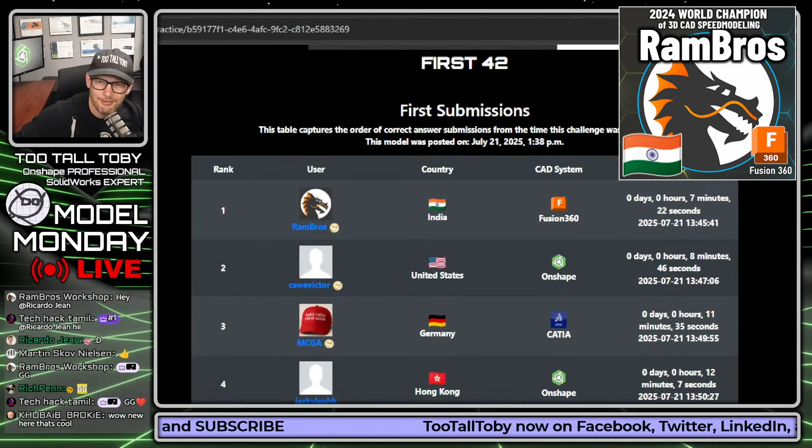We can see that the very first person to finish that one was none other than RamBros Workshop, our current world champion of 3D CAD speed modeling using Fusion, and did it in just 7 minutes and 22 seconds from the time the model was released. So it took me 22 minutes, but it took RamBros a mere 7 minutes and 22 seconds.

That is super impressive, followed quickly by Victor K using Onshape, 8 minutes 46 seconds, followed by MCGA at 11 minutes 35 seconds, by Jackie coming in with 12 minutes and 7 seconds from Hong Kong, and we see Dom here did it in 12 minutes 39 seconds.